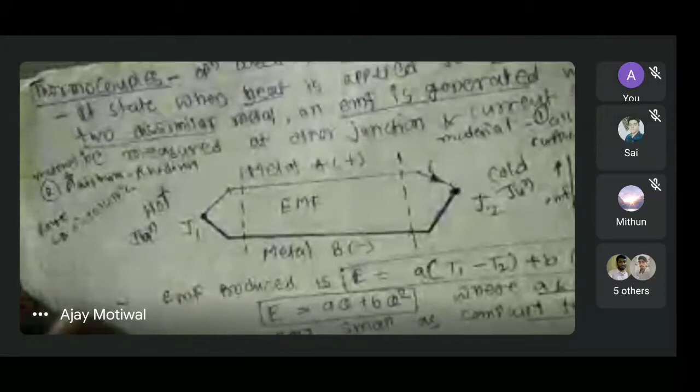That is the liquid in glass thermometer, the resistance temperature detector and the thermistor. And today we see the temperature measuring device called the thermocouple. So a thermocouple is a device for measurement of temperature, and its operation is based on the Seebeck effect.

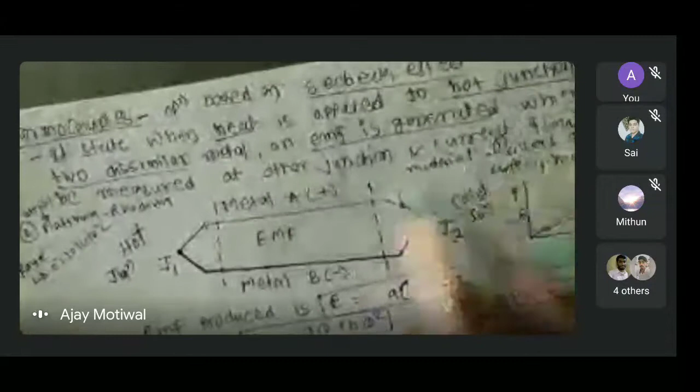So what does it state? It states that when heat is applied to a hot junction of two dissimilar metals, an EMF is generated which can be measured at the other junction, and current flows. So whenever we consider the principle of the thermocouple, two dissimilar metals are joined together. The upper one is one dissimilar metal, and the lower one is a second dissimilar metal.

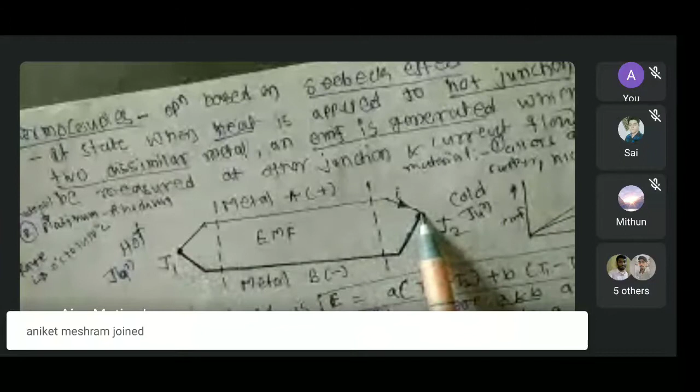And these two dissimilar metals will be subjected to different temperatures: the hot junction, and the cold junction at the lower temperature. The hot junction will be at the higher temperature, and whenever this is subjected to a temperature, the EMF is going to be generated in the circuit.

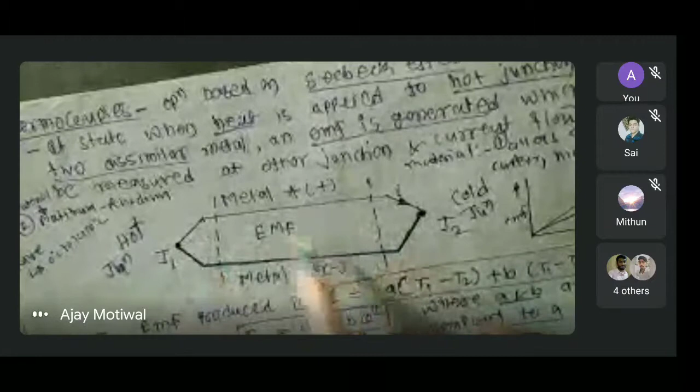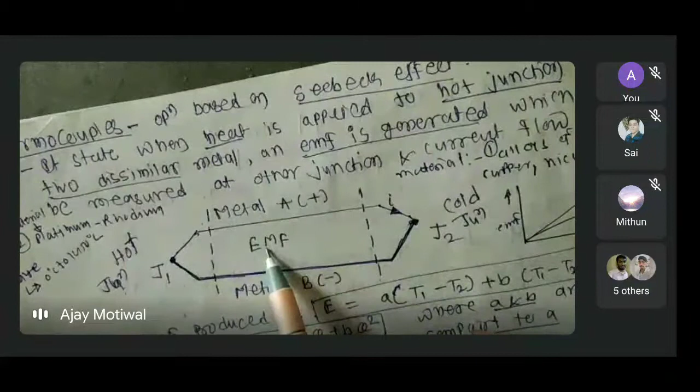It states that whenever heat is applied to the hot junction, or the hot junction is subjected to the temperature of the body whose temperature we want to find out, this temperature will release heat, and due to this heat the current flows inside this circuit, and EMF is generated due to the Seebeck effect, and this EMF is to be measured by using some circuit.

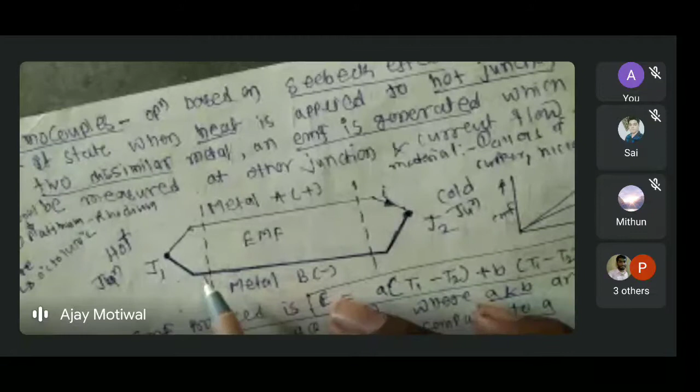You can see the two dissimilar metals, metal A and metal B. The upper one is metal A and the lower one is metal B, and the probable combination of materials is given as platinum rhodium: the upper may be platinum and the lower may be rhodium, or it may be alloys of copper, iron, and nickel. So these are the two dissimilar metals which are going to be considered.

I have seen various students just joining the class and leaving the class. I don't know the reason, but if this happens, it will be seen on my screen and it will be seriously viewed.

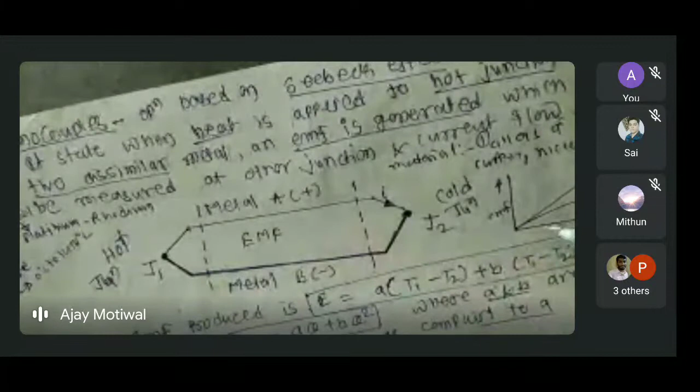So whenever the two metals are there, in terms of graphical representation, temperature will be on the x-axis and EMF on the y-axis. So there will be a graph for increase in temperature. As there is increase in temperature, there is increase in EMF, increase in electromotive force. So it is a linear type of relationship.

So for iron, the graph will be like this. For copper, the graph is at a slightly higher inclination. Like that, for every material we can have a graph of temperature versus electromotive force, which is a linear relationship. As the temperature changes, EMF changes linearly in the positive sense. So increase in temperature, increase in EMF.

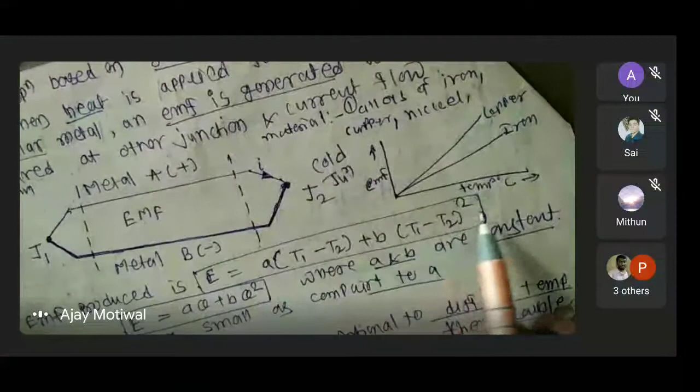So if you consider a mathematical relationship, the EMF generated is given by E = a(T1 − T2) + b(T1 − T2)², where T1 is the temperature of the hot junction and T2 is the temperature of the cold junction. Again, T1 is the temperature of the hot junction, T2 is the temperature of the cold junction, and a and b are considered constants.

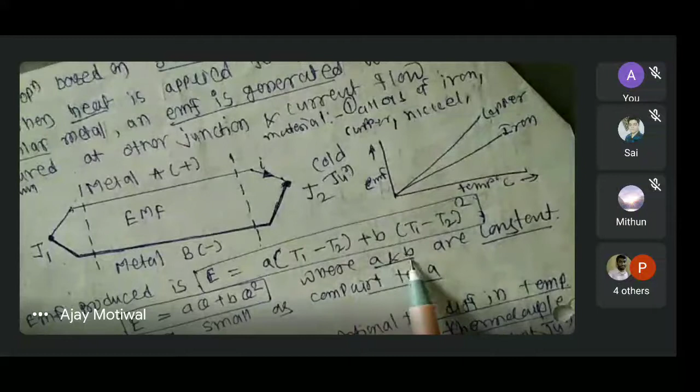So E is equal to a, with T1 − T2 replaced by theta, the change in temperature, plus b theta squared. So it becomes E = aθ + bθ². As the value of b is very small compared to a, we neglect this higher order term.

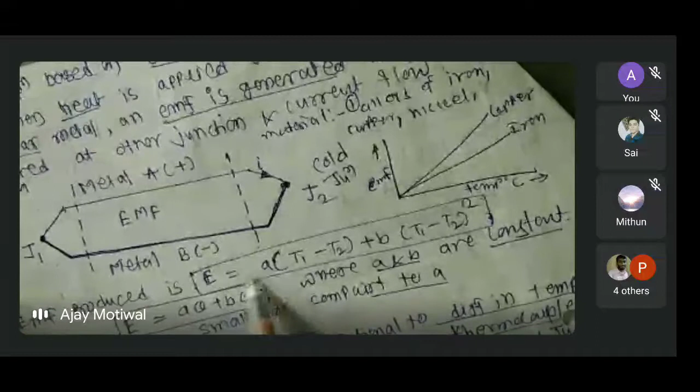So what will happen? E, the electromotive force, is directly proportional to a multiplied by theta, where a is a constant. So here there is a relationship between the electromotive force and the increase in temperature. So the EMF is directly proportional to the difference in temperature, because theta is the difference in temperature.

If the cold junction is kept constant, it means the temperature value of T2 is kept constant. So what is theta actually? It is the difference T1 − T2. Where T2 is constant, then what will happen?

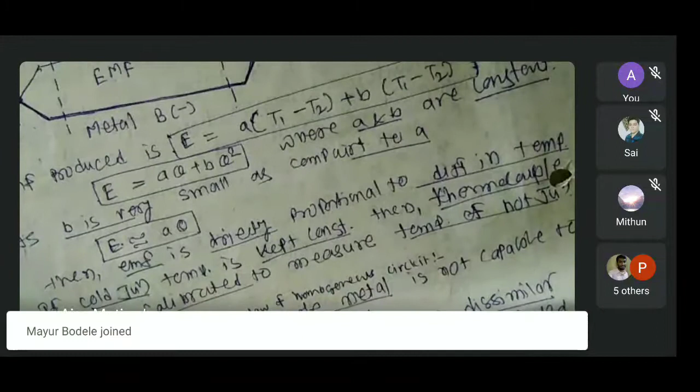EMF is directly proportional with T1, where T1 is the temperature of the hot junction. So we can say the temperature is directly proportional with the EMF. Then the thermocouple can be calibrated to measure the temperature of a hot junction.

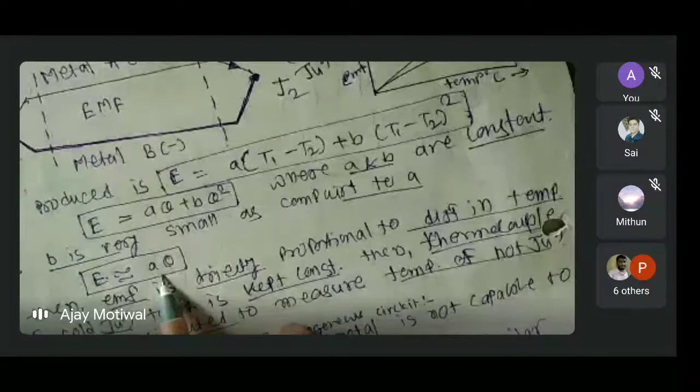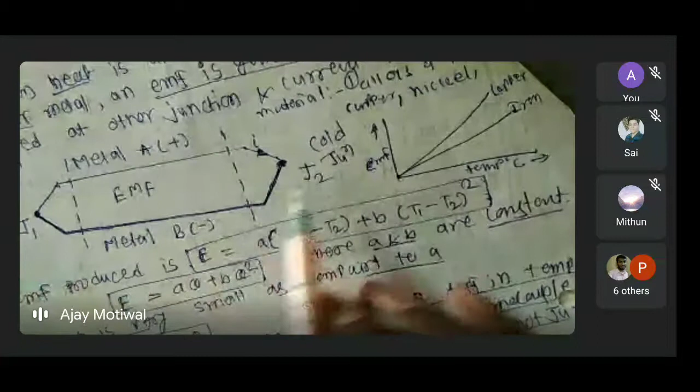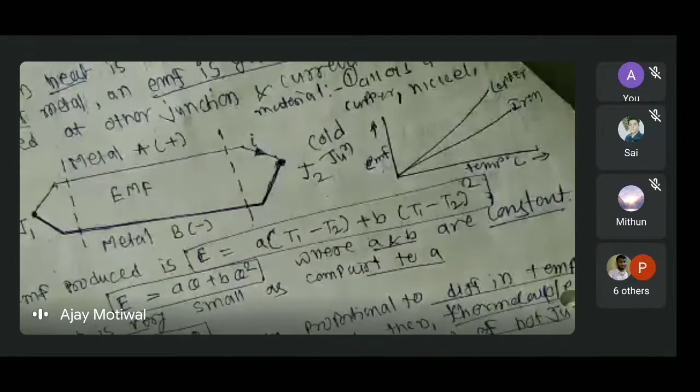So in this way, we can have an EMF directly proportional with the temperature T1, where we consider the hot junction, which is subjected to a body whose temperature is T1, and the cold junction is an area having the temperature T2. Due to the difference of temperature there is a flow of current inside these two metals, and indirectly the EMF, electromotive force, is generated. This electromotive force we can measure with the help of some circuit, and it is nothing but the change in temperature. So in this way we are able to measure the temperature of a body.

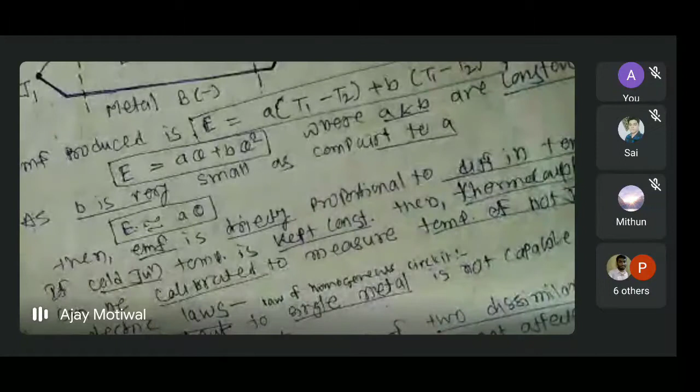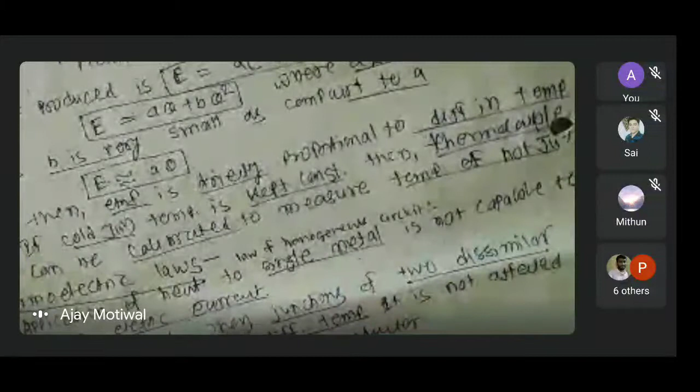So which are the different laws related with that? There are some thermoelectric laws. One is the law of homogeneous circuit. Application of heat to a single metal is not capable to produce electric current. If it is a single metal, that doesn't have any meaning. That's why we are using two dissimilar metals, metal A and metal B. Two dissimilar metals must be joined; it is a necessary condition for generation of thermoelectric EMF. If it is a single metal, there will not be any generation of EMF.

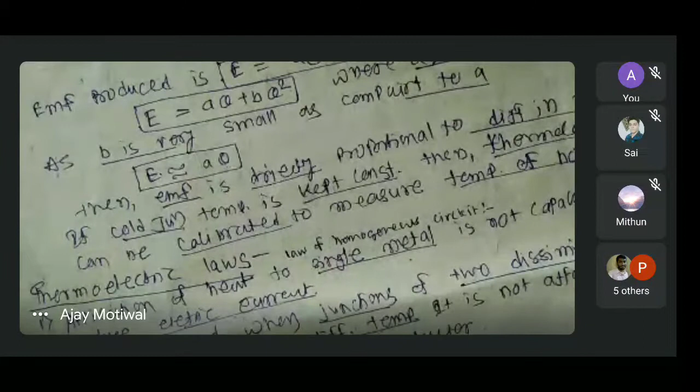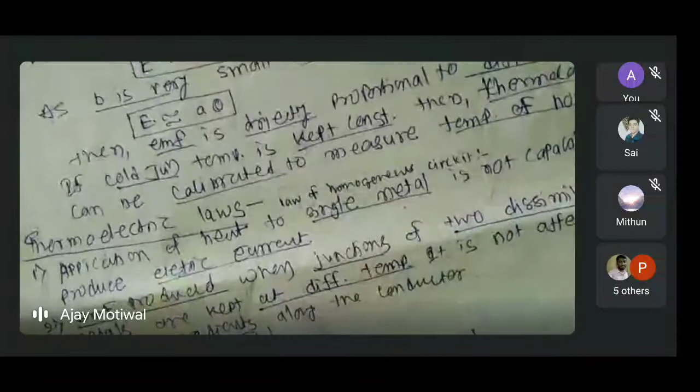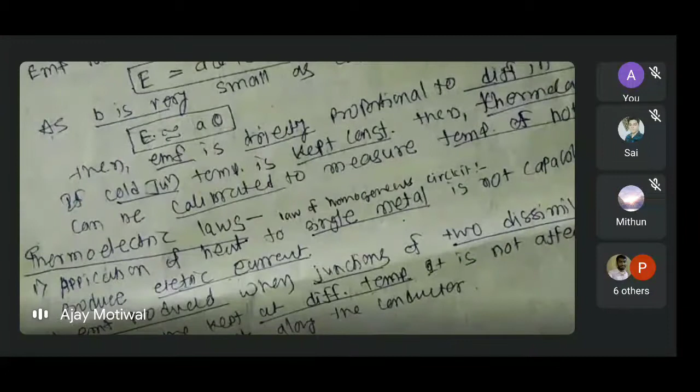The second thermoelectric law: the EMF is produced when junctions of two dissimilar metals are kept at different temperatures. So EMF is only going to be produced whenever there is a difference in temperature, whenever two dissimilar metals are kept at different temperatures. It is not affected by the temperature gradient along the conductor. So along the conductor there will not be any effect.

If you consider this figure, J1 is a junction of two dissimilar metals where the temperature is T1, and J2 is the second junction where the temperature is T2. In between, we can have a temperature gradient. Here T3 is there, and here is T4. There is metal B and metal A. The law says EMF is produced when junctions of two dissimilar metals are kept at different temperatures, and it is not affected by the temperature gradient along the conductor.

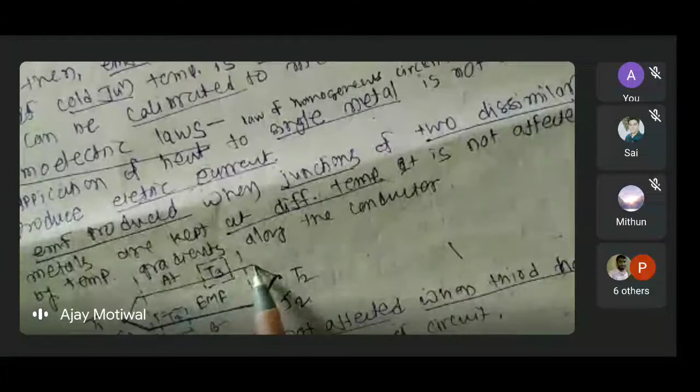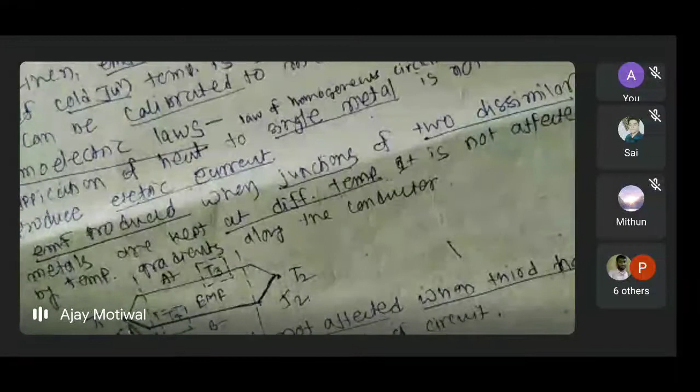So even though there is a T3 or T4 whose temperature may be different from T1 and T2, it will not affect the value of EMF production, because whatever gradients or changes in temperature are along the length of the conductor, they will not affect it. Only the temperature variation at the point of junction J1 and the point of junction J2 matters.

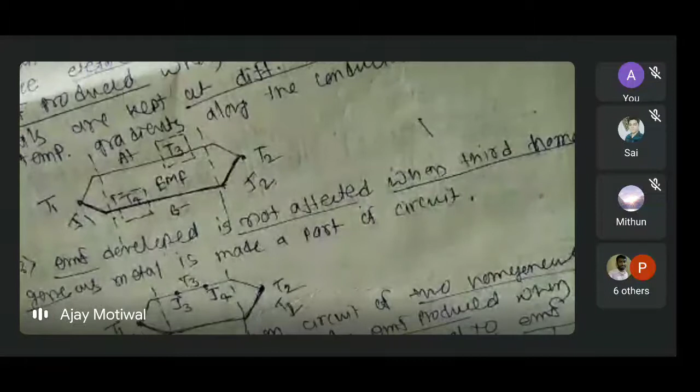According to the third law, the EMF developed is not affected when a third homogeneous metal is made a part of the circuit. If you consider here J1 is a hot junction subjected to temperature T1, J2 is a cold junction subjected to temperature T2, and one more junction is created here, J3 and J4, where the temperature is T3. The law says the EMF developed is not affected when a third homogeneous metal is made part of the circuit. So this is metal A, this is metal B, and this is the third metal, metal C.

So a third homogeneous metal is introduced, and due to the introduction of the third homogeneous material, there will not be any effect on the EMF production. The EMF developed is not affected by the introduction of the third material in the circuit at this location.

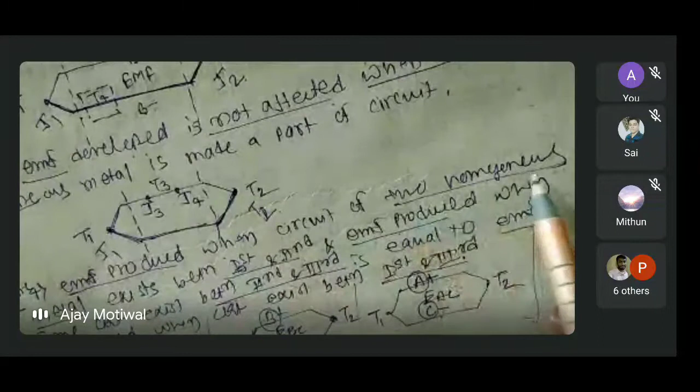Another law: the EMF produced when a circuit of two homogeneous metals exists between first and second, plus the EMF produced when the same circuit exists between second and third, is equal to the EMF produced when the circuit exists between first and third. In this figure, T1 is the temperature of the hot junction, T2 is the temperature of the cold junction, with material A and material B. So the EMF produced is EAB.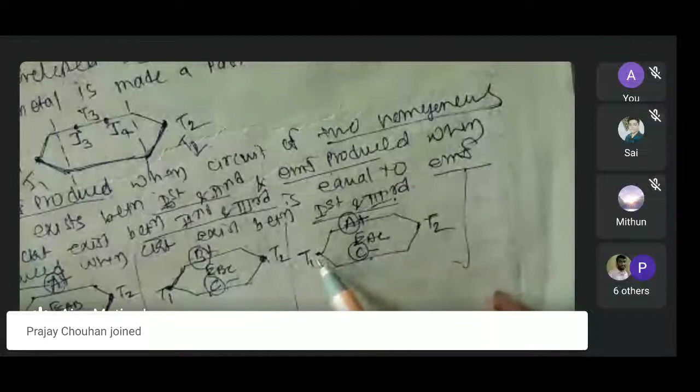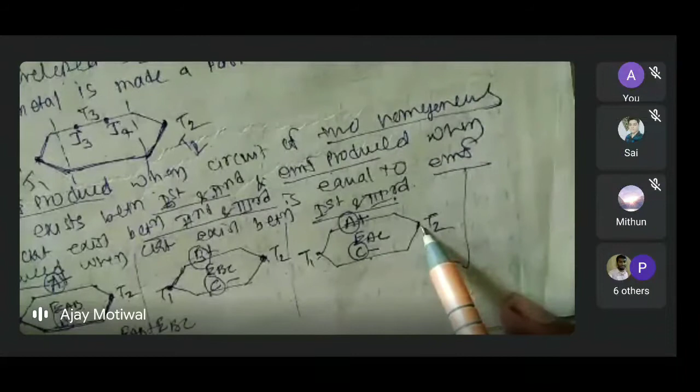Similarly, EBC is the second condition, where the temperature of the hot junction is T1 and the cold junction is T2, with second metal B and third metal C. In another figure, the hot junction is at T1, the cold junction at T2, the upper material is A and the lower material is C. So the law says the EMF produced when a circuit of two homogeneous metals exists between first and second.

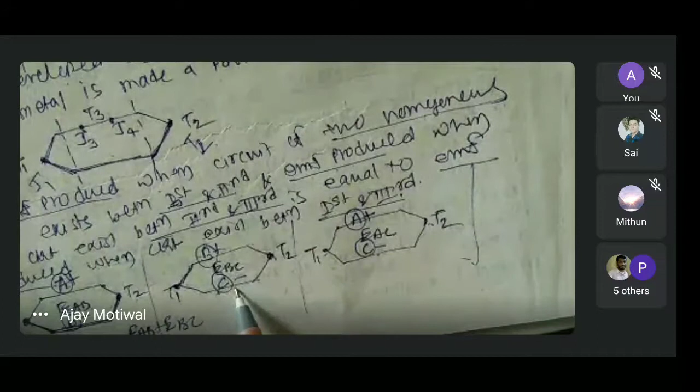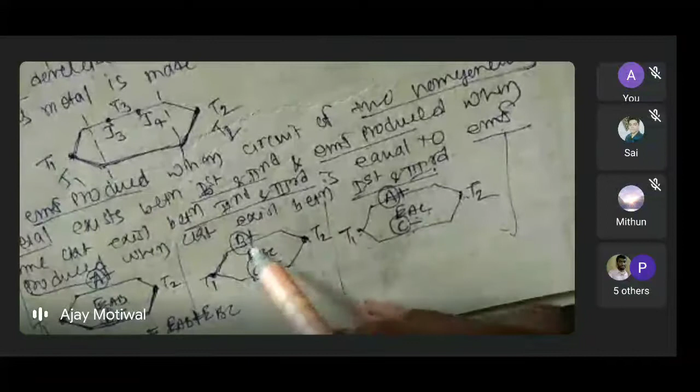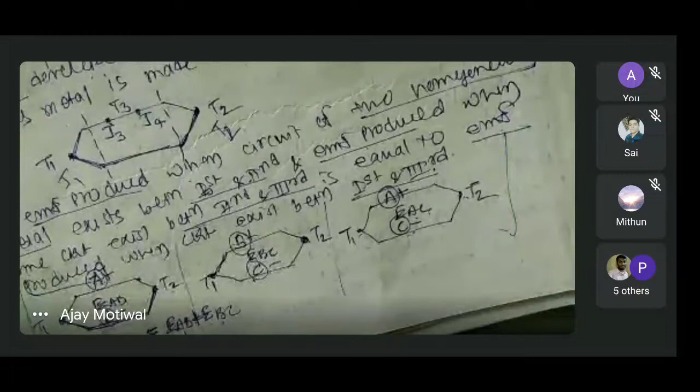Here first and second, EMF produced when the same circuit exists between second and third. So here metal A and metal B is there, and metal B and metal C is there, and it is equal to the EMF produced when the same circuit exists between first and third, that is metal A and metal C. So EMF produced EAC is the total EMF produced, which is nothing but addition of EMF AB plus EMF BC. So according to this law, EMF produced between the first and third metal is equal to EMF produced between the first and second plus EMF produced between second and third.

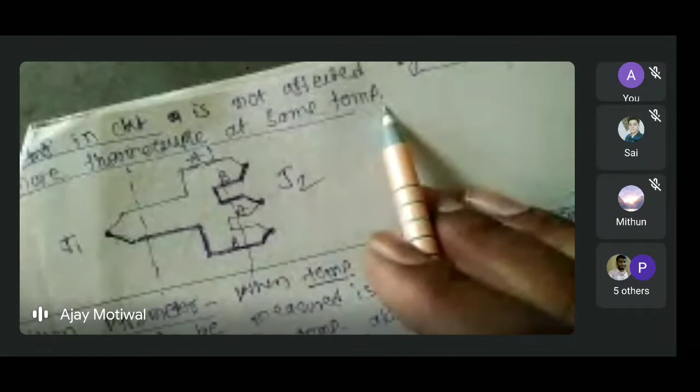It's addition of previous two. This is the law of intermediate metals. Accordingly, thermocouples may be constructed, and the last point is that the EMF in the circuit is not affected by the addition of more thermocouples at the same temperature. So if you add more thermocouples at the cold junction, here is a thermocouple, here is a thermocouple, here is a thermocouple added in the cold junction, whereas there is one junction in the hot junction, J1, the EMF in the circuit is not affected.

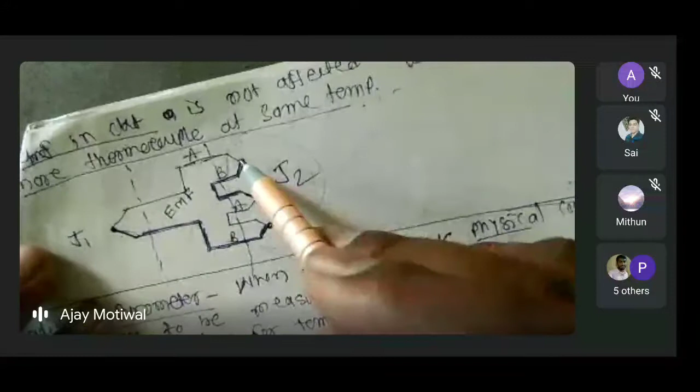Whatever EMF is generated is not affected by the greater number of thermocouples at the same temperature. This area is subjected to the same temperature T2. Junction J2 is subjected to temperature T2, whereas junction J1 is subjected to temperature T1. So if you are adding thermocouples here at temperature T2, it is not affected. If you add 1, 2, 3 or 4 junctions at temperature T2, it will not affect the production of electromotive force in the circuit due to such construction.

Based on these laws, thermocouples are manufactured and are available in the market according to the range of temperature they are going to be used for. So this is all about how the thermocouple is able to measure the temperature of a hot body.

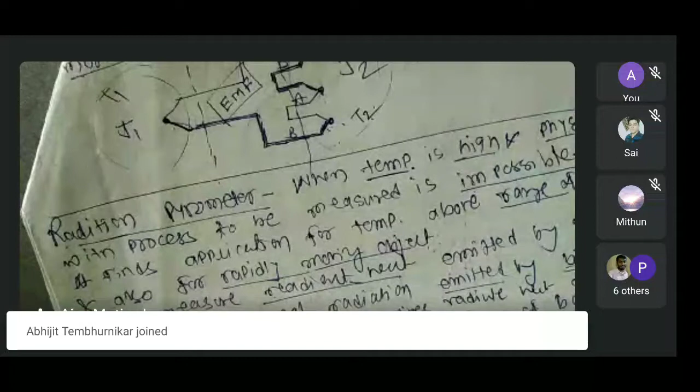The second parameter or instrument used for measurement of temperature is the radiation pyrometer. The radiation pyrometer is, we can say, for a higher range as compared to the previous temperature measuring devices. So in the radiation pyrometer, what is there?

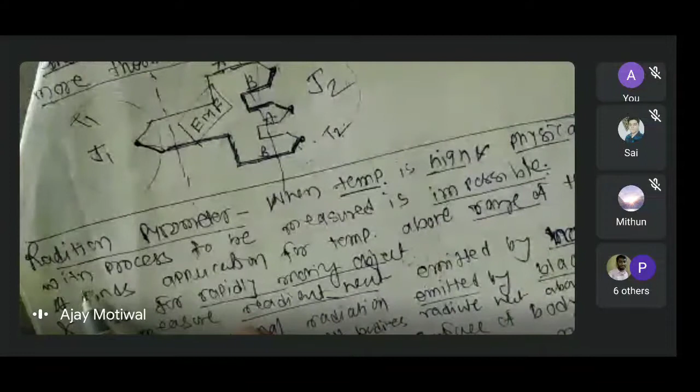It is used when the temperature is high and physical contact with the process to be measured is impossible. We don't want to physically contact the body whose temperature we want to measure.

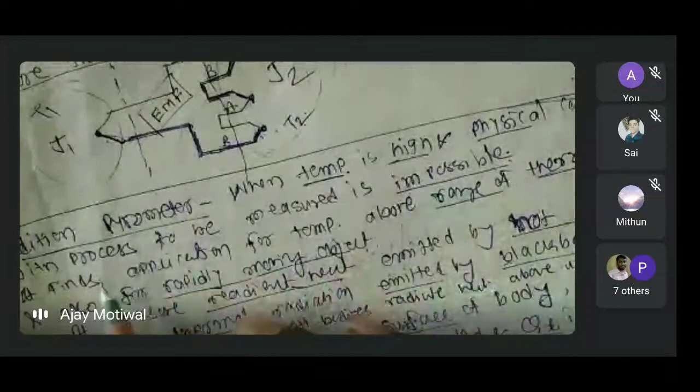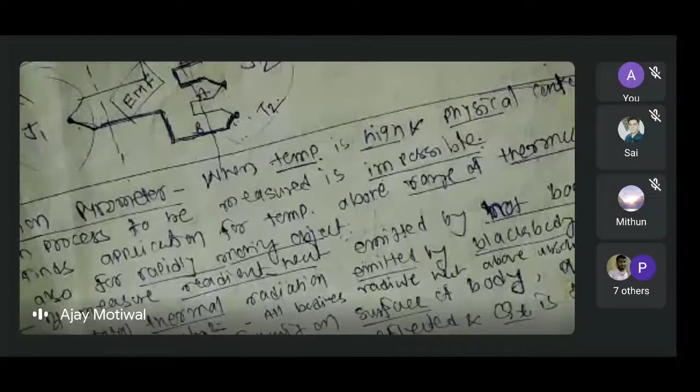In such cases, whenever the temperature is in the higher range, more than 1500 degrees centigrade or like that, you can suitably select the radiation type of pyrometer. That is the importance of this radiation pyrometer, and it finds application for temperatures above the range of thermocouples. So what is the range of thermocouple? Above that range, we go for the radiation pyrometer, and also for rapidly moving objects.

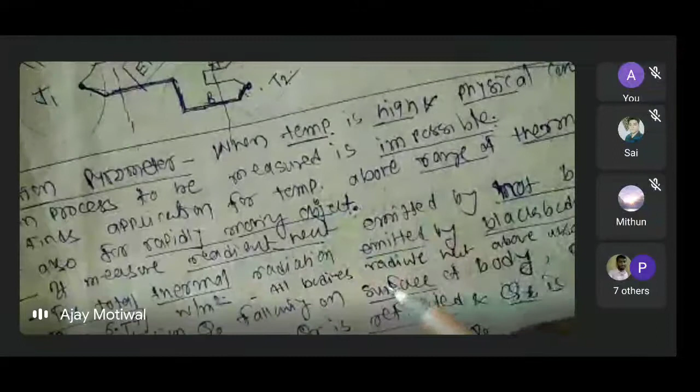Whenever there is a rapidly moving object, in such cases we select the radiation pyrometer. For example, the temperature of molten metal, which is a rapidly moving object, we can measure the temperature of molten metal coming out of a foundry or casting process. In that case we cannot touch that molten metal by hand, and we have to measure its temperature, so we go for the radiation type of pyrometer.

So it measures the radiant heat emitted by the hot body. The hot body is the molten metal, and the molten metal is flowing, so heat is going to radiate from that molten metal.

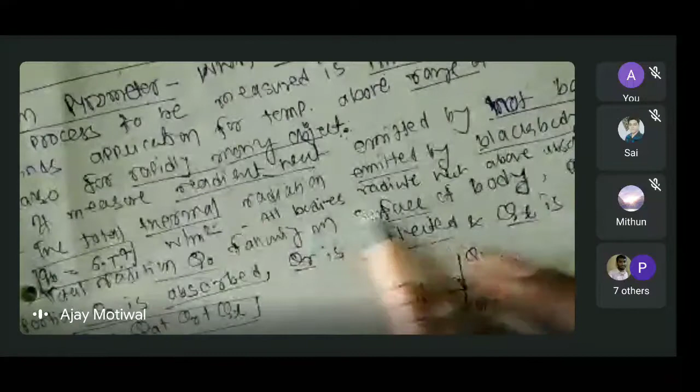The total thermal radiation emitted by the black body is Qb, which is equal to sigma into T raised to power 4. According to this black body emission law, we have this standard relation, sigma into T raised to power 4, meaning the fourth power of temperature. Heat is emitted from a black body, and all bodies radiate heat above the absolute zero temperature.

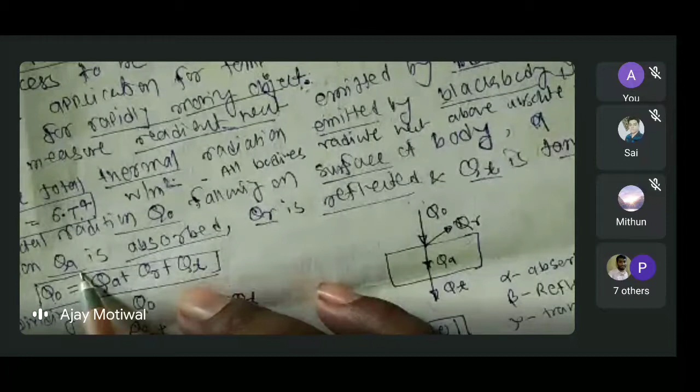So the total radiation, suppose Q0, falling on the surface of a body, a portion of it is absorbed, a portion of it is reflected. So whatever is absorbed, that is QA, is the heat absorbed, QR is the heat reflected, and QT is the heat transmitted.

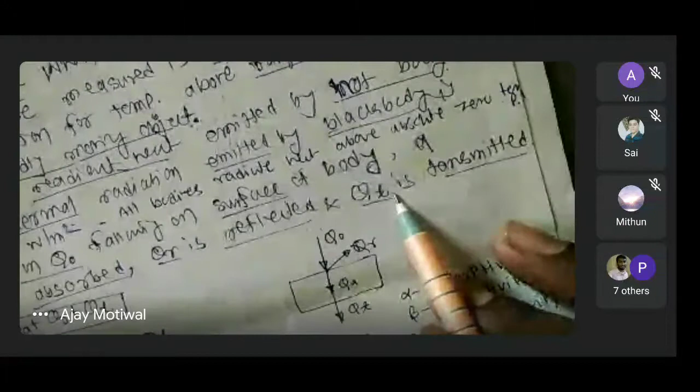So already you learned this in heat transfer, the various modes of heat transfer, where the radiations coming from the hot body, that is Q0, will be partially absorbed as QA, partially reflected as QR, and partially transmitted as QT. So whatever radiations are coming from the hot body, they are going to be absorbed, reflected, and transmitted through this body.

So this is the body in which the heat is going to be transferred.

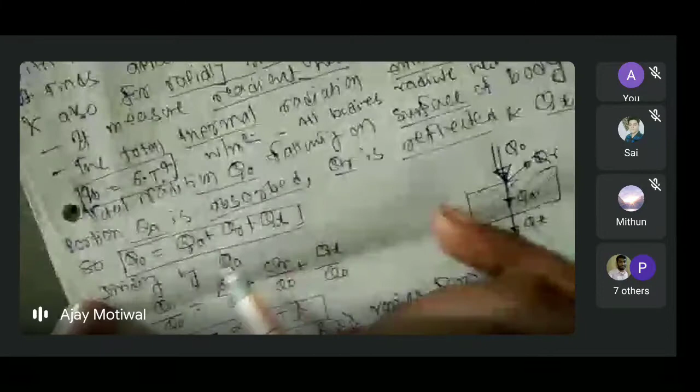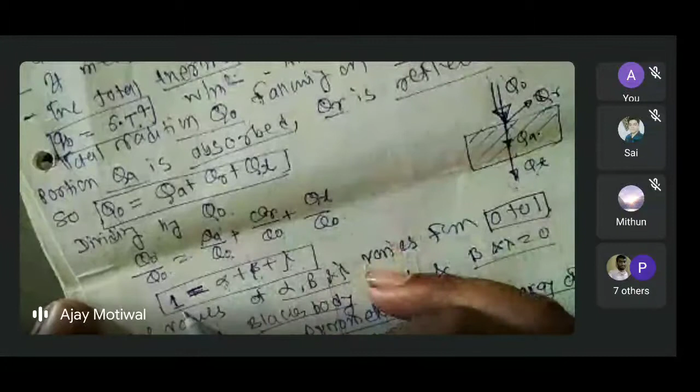We already know the total heat Q0 equals QA plus QR plus QT. Dividing this equation by Q0, we get Q0 upon Q0 equals QA upon Q0 plus QR upon Q0 plus QT upon Q0. Q0 upon Q0 is 1, QA upon Q0 is alpha, QR upon Q0 is beta, and QT upon Q0 is gamma. So alpha plus beta plus gamma equals 1. This is one of the well-known equations related to heat transfer.

Alpha stands for absorptivity, beta for reflectivity, and gamma for transmittivity, and alpha plus beta plus gamma will all be equal to 1.

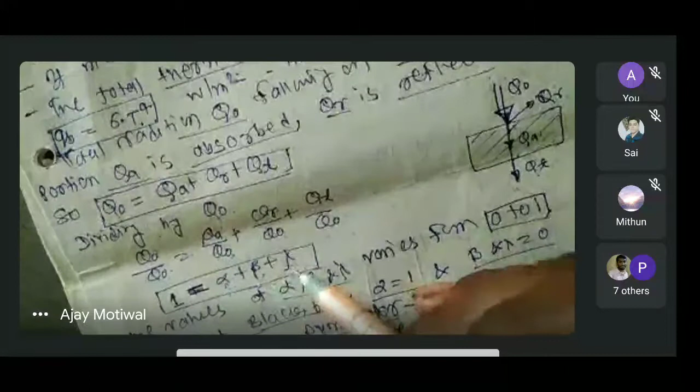That's why a black body is a perfect absorber. Black body is a perfect absorber, where the values of beta and gamma are equal to 0, so alpha equals 1. When alpha equals 1, it is a perfect black body where absorptivity, the value of alpha, equals 1. That's why the black body will absorb more heat compared to other bodies.

So these are all concepts related to heat transfer, and we are using it for our temperature measuring device.

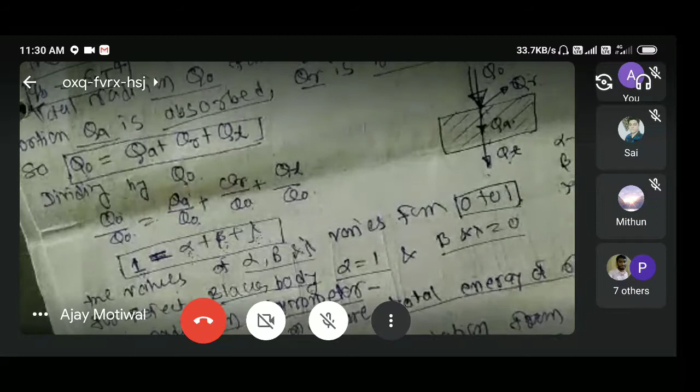The values of alpha, beta, and gamma vary from 0 to 1. Since the addition of all these values equals 1, each value will definitely vary from 0 to 1. It may be 0.1, 0.2, 0.3, 0.4, 0.5, and so on, but the addition will always equal 1, never more than 1. For a perfect black body, alpha equals 1, where beta and gamma equal 0.

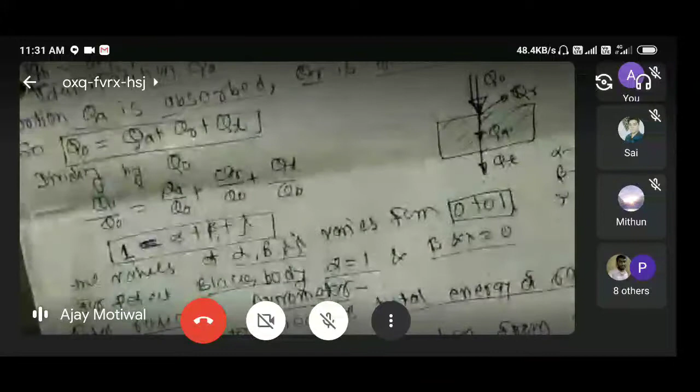So these are the concepts related to heat transfer which are going to be used in this radiation type of pyrometer. Based on that, we are constructing a radiation pyrometer, an instrument for absorbing the heat.

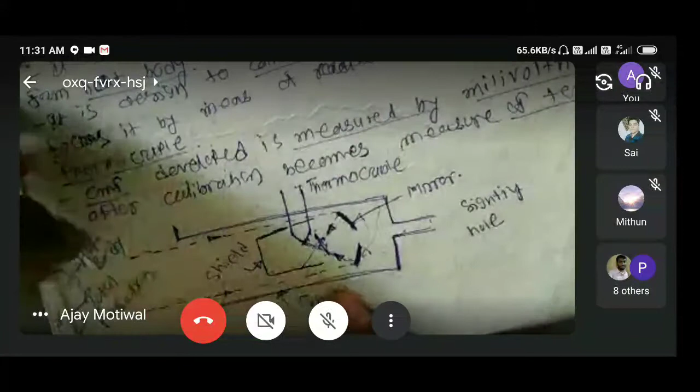So here, a total radiation pyrometer instrument is a metallic shield. This instrument we can call a radiation pyrometer. We have the hot body whose temperature we want to measure. The heat will be radiated from this hot body, and this heat will be radiated onto this mirror.

The rays are coming out of this, the radiations fall on this mirror. From this mirror, it is reflected because of its inclination, and from this also the radiation is reflected. After reflection, the heat is concentrated at this point because of the curvature and shape of this mirror.

The heat is made to concentrate on this junction, and that junction is the junction of a thermocouple. On this side we find the shield, so the radiations don't escape this instrument. From here you find the sighting hole, so we are able to see what is going on in the system.

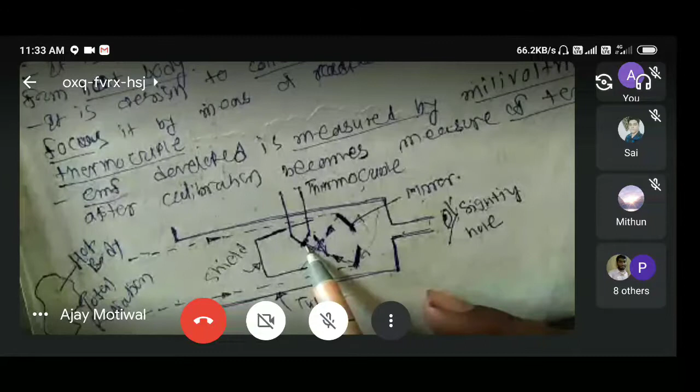So this hot junction is subjected to a high temperature, the temperature of the hot body. In this way, the thermocouple is used in this instrument as a radiation pyrometer for measurement of temperature, as you have already seen the working of a thermocouple. This junction is nothing but the hot junction of a thermocouple. So whenever it is subjected to heat, what happens is current flows inside the circuit, because this is made of some material.

This is made up of some material, and the other side is other material. So two dissimilar metals are there. EMF is going to be produced in the thermocouple, and this EMF we want to measure, which is indirectly the measure of temperature of this point. Indirectly we measure the temperature of this radiant heat of a hot body.

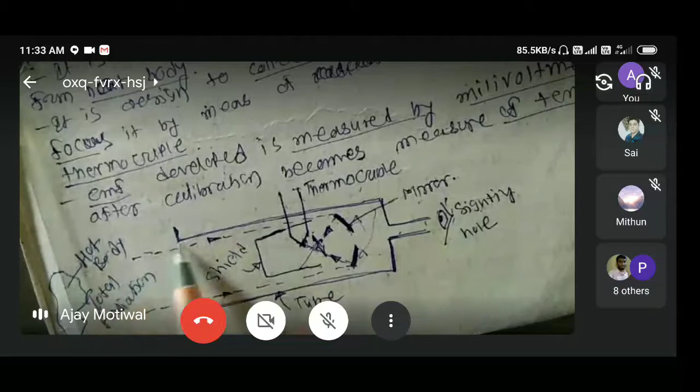So we cannot have the physical contact because this is far away from this instrument. This is the instrument and this is the hot body, so there is a distance between instrument and the hot body. So we don't have physical contact with the hot body, and indirectly we are measuring the EMF, which is calibrated in terms of the temperature of a hot body.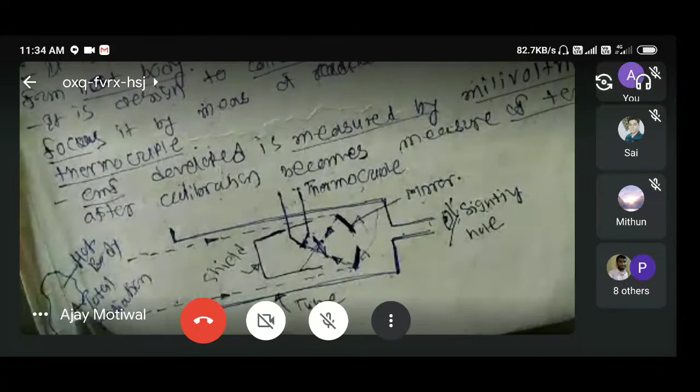So it is used to measure the total energy of radiation from the hot body. It is designed to collect the radiation from the object. So whatever object is there, we are collecting the radiation and focusing it by means of a mirror. With the help of the mirror, we are focusing all the energy on this thermocouple, and EMF is developed which is going to be measured by a millivoltmeter.

You can measure the EMF by millivoltmeter, and after calibration, it becomes a measure of the temperature of the object or body. So we can measure EMF, which is indirectly a measure of the temperature of a hot body, by using the radiation type of pyrometer.

So which are the advantages related with this? These are the advantages or characteristics of this type of radiation pyrometer. It has a high speed of response, so for moving objects, or where the temperature is very high, we can go for the radiation type of pyrometer.

There is no direct contact; physical contact is not there. This is one of the applications where we don't want to have physical contact with the object, just like a furnace or hot body, hot metal, molten metal. We cannot have direct contact.

So these are some of the characteristics, salient features related with the radiation type of pyrometer. Another instrument in the same category is the optical type of pyrometer, the optical pyrometer. This is on the same lineup with the radiation type of pyrometer - it has similar characteristics or salient features as the radiation pyrometer.

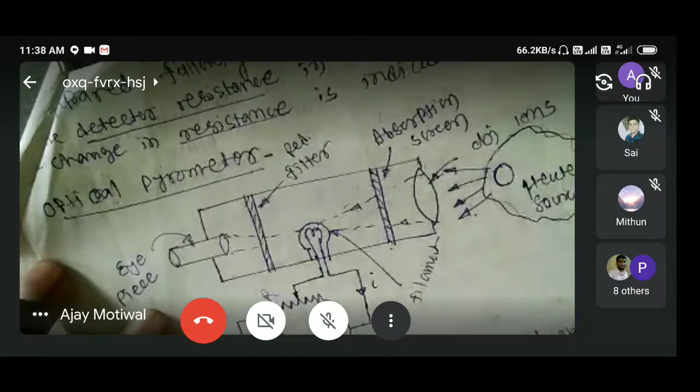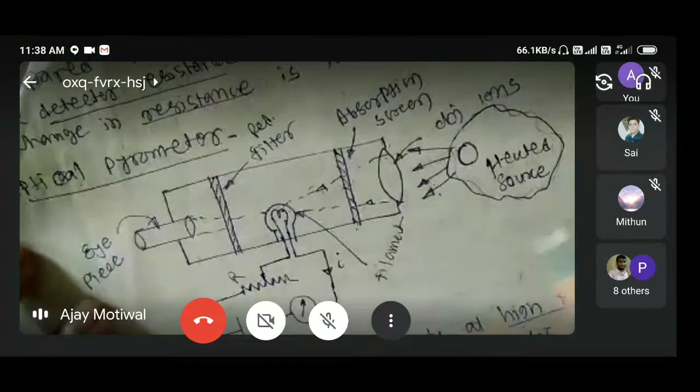We don't have to physically contact the heated body and the instrument; they have a large distance between them. If you look at this figure, the optical type of pyrometer has a heated source on the right hand side, which emits heat in the direction of the arrow, and this heat falls on the objective lens, and from this objective lens it passes through the absorption screen, which filters out the rays.

These rays are passed again to this lamp or filament, and these rays of the hot body again cross this red filter to filter out some unwanted signal, unwanted rays, and again it falls on this eyepiece. Through the eyepiece we can see the image of this filament, indirectly, from the correlation with the filament image and the hot body.

This filament, as you see on the bottom side, is connected with the electrical circuit. One of the leads is connected with a variable resistor, and this resistor is connected with a battery source, positive terminal and negative terminal, and another is connected with a meter to measure the current flowing through the circuit - an ammeter, showing I as the flow of current inside the circuit.

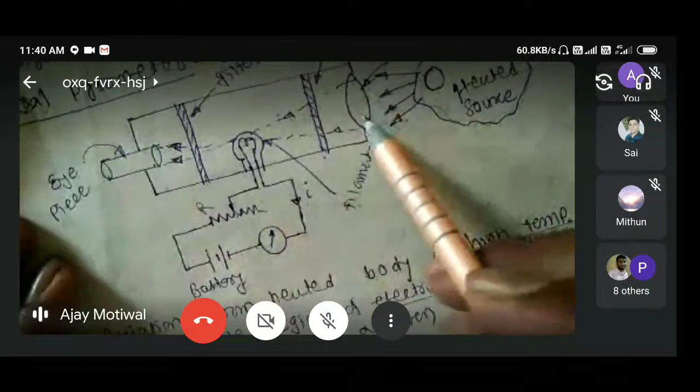So it is related with the optical pyrometer. We can have the lenses, objective lenses are there, and this complete body is in the complete casing. ये पूरा casing है, the objective lens, absorption screen, and filament, and the light filter, and this eyepiece is completely enclosed in the casing, and this is completely an optical type of pyrometer, and there is a distance between this instrument and the heated source.

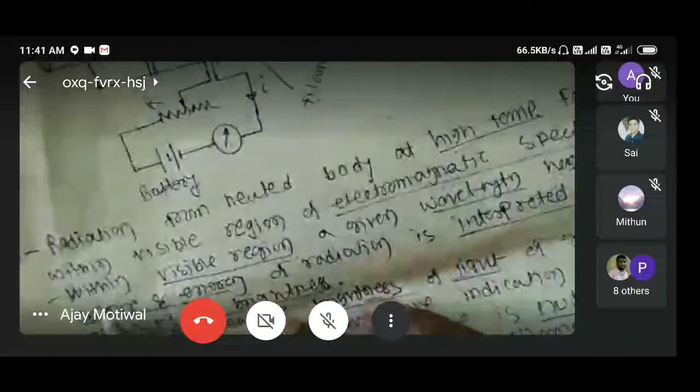So from the working point of view, the radiation from the heated body at high temperature falls within the visible region of the electromagnetic spectrum. So within the visible region, a given wavelength has fixed color, and the energy of radiation is interpreted as intensity or brightness. So heat is going to be liberated from this heated source,

and this heated body may have different colors. It may be a red color or orange color, or maybe a white color. So as you go on increasing the temperature, we can have white color. At lesser temperature, it can have orange color or yellow color. So whatever the heat source, it may be molten metal or the temperature of a furnace, it will have these colors depending upon the temperature.

So these colors are going to be changed above 450 degrees centigrade. Above 450 degrees centigrade to 1000 degrees centigrade, you can find the change in colors of the metal whenever we are heating it in the furnace. It is not affected at lower temperature. So if you measure the brightness of light of a given color emitted by a hot body, we have an indication of temperature.

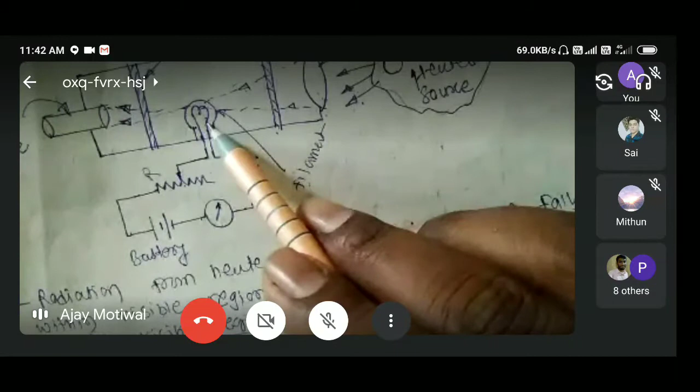So we want to measure the brightness of this filament. So how will the filament look? What is the image of the filament? Based on the image of the filament, we are able to characterize the temperature of the hot body. An image of the radiating source is produced by the lens, and it is made to coincide with the filament. So the lamp intensity is adjusted as current through the lamp filament is made variable, and the current is adjusted until the filament and image are of equal brightness.

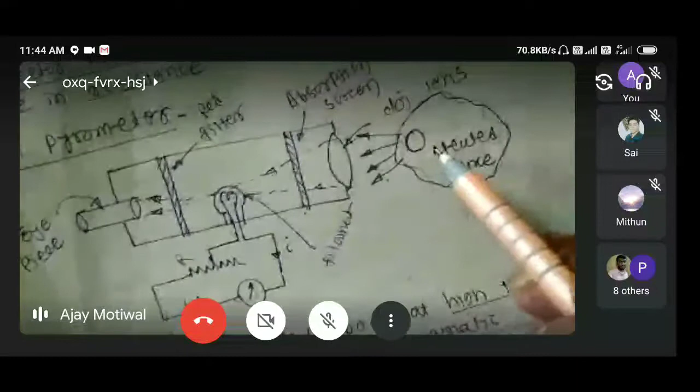So whenever the image is disappeared, we can relate the temperature of the hot body and the current flowing through the circuit. Whenever the temperature of the hot body is equal to the temperature of this filament, then through the eyepiece we cannot see anything. It is an indication that whenever we cannot see anything, the image is disappeared, we can come to the conclusion that the temperature of the hot body is equal to the temperature of the filament.

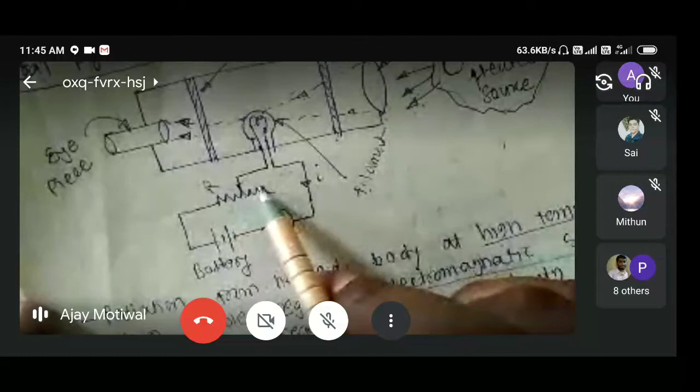And that's why we can change it by changing the position of this pointer over the resistance. Because the pointer is movable, we can change the resistance, which means we can change the value of current flowing through the circuit.

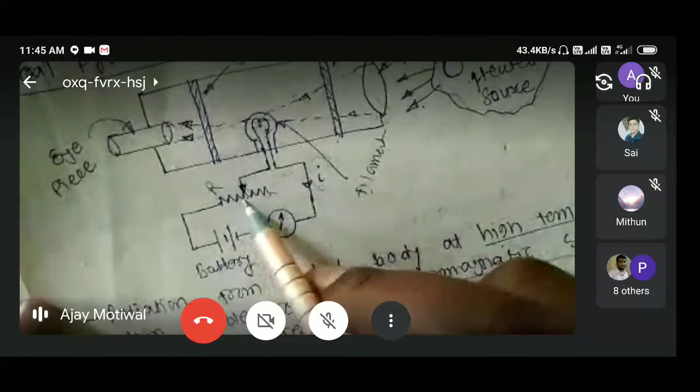Until the image disappears, we want to move this resistance. As soon as the image disappears, it indicates that the temperature of the hot body is equal to the temperature of the filament. At that point we will stop and measure the current flow in the circuit. So that will be the indirect measurement of temperature, because the current measured in this ammeter is directly calibrated in the temperature of this filament, and this filament temperature is directly related with the temperature of the hot body.

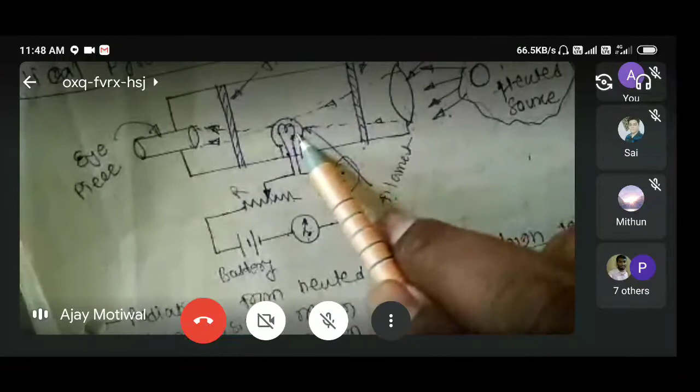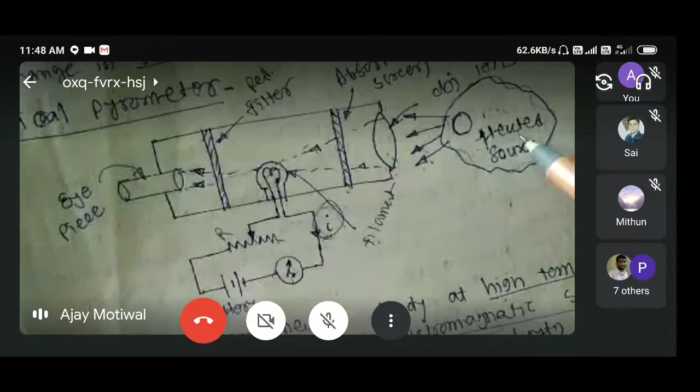That will be measuring the current, and this current will be measured in the circuit. But the current is directly calibrated in relation with the temperature of this filament, and whenever the filament disappears, it is a function of the temperature of a hot heated body, which is at a larger distance as compared to this instrument. So in this way we are able to measure this value of current flow, or calibrate the ammeter in terms of temperature.